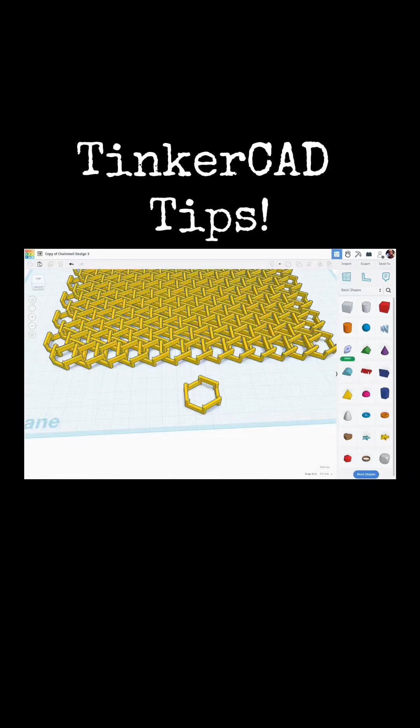TinkerCAD tip, still talking about 3D printed chainmail or these flexible fabrics. This is a design that I created myself. I just started with a polygon here, a six-sided polygon, a hexagon, and made some changes to it.

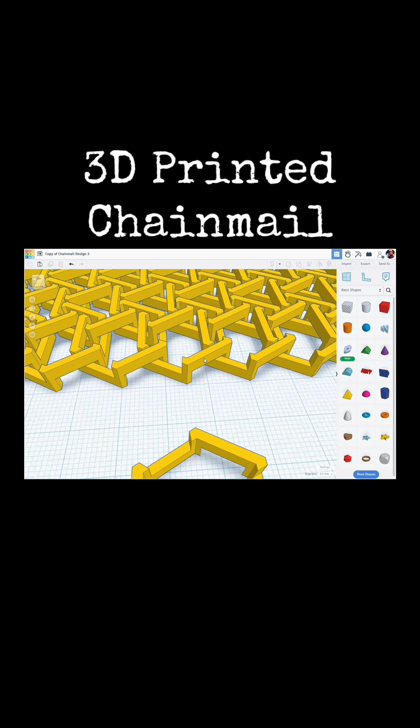You can see where this goes up and down, over and under. If we look at a piece of it here, again, there's a gap that goes between each piece so that when it prints, it doesn't stick together.

The way I made this, I'll show you here. Let's grab a duplicate of that, bring it over. Let's ungroup that. And you can see here that it's a number of hole shapes and a solid shape. So here we just have a hole hexagon that was made a little bit smaller. And then here, if I bring this up, you can see this is just a couple of triangles. The same with underneath.

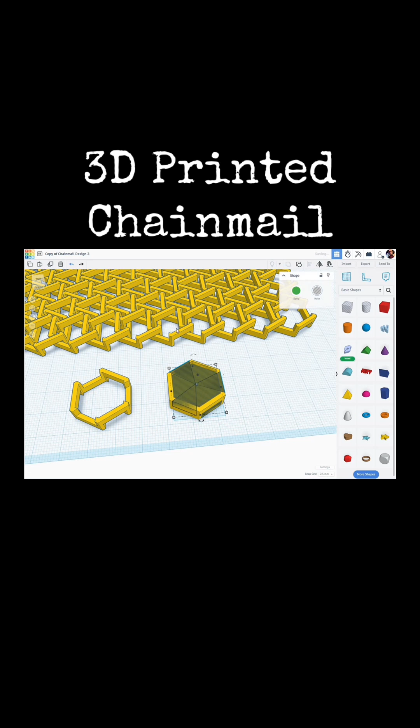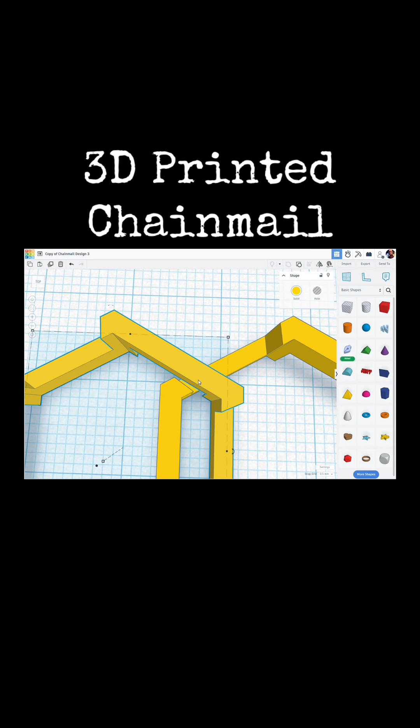So let's take a duplicate of that and we'll shift nudge this over a little bit. We'll zoom in to make sure our spacing is good. It's a little too close. Let's move that over. There we go. And by keeping that selected and hitting Control D, I could move out.

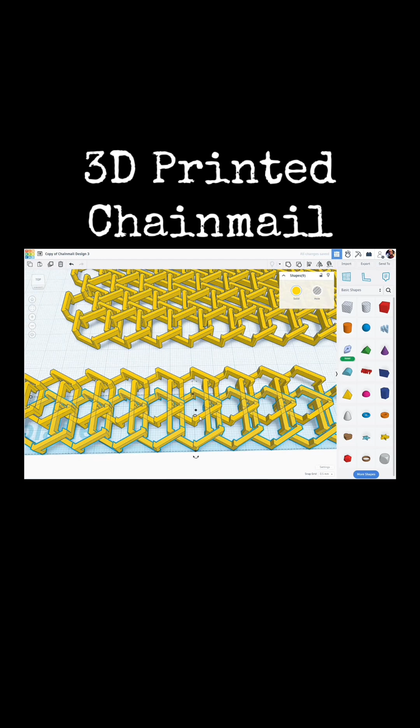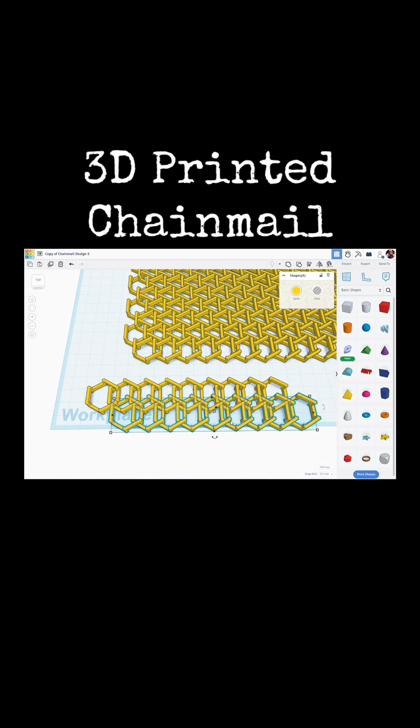We can select all of these. Let's make a duplicate of that. Now on this one, we're going to have to shift over a bit. So if we zoom in here, we can get our spacing correct. There we go. Zoom in a bit. Let's move that back over. Let's move that back one this way. There we go.

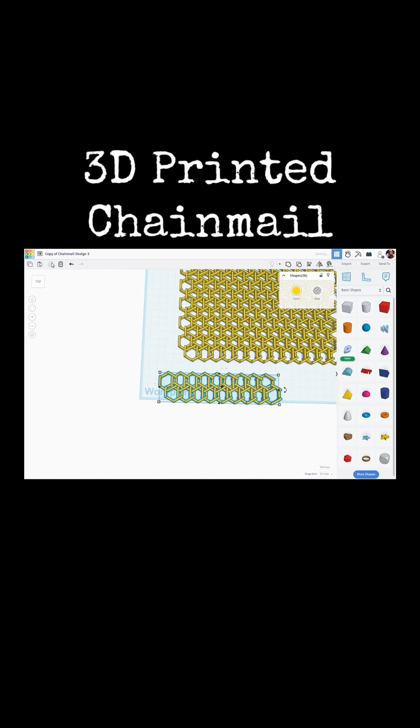Right now that we have those two rows, because they're offset, we'll have to take a duplicate of that. And again, we'll shift nudge those into place. Right about there. Keeping that selected, we'll just start hitting Control D.

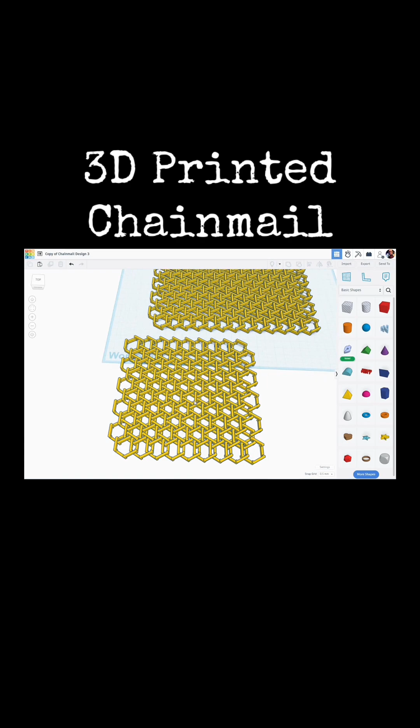Now we could make these sheets as small or as large as we want. So let me show you what this looks like when this is 3D printed. And this is that open hexagon design. If we look at a corner here, you can see the six-sided object with 3 down and 3 up. This was printed at a fairly large scale. I still have plenty of room to shrink this up a bit, but it's a very open design, quite flexible.

It printed well. I didn't have any parts of it sticking together. As you get smaller, you might run into problems with that, but as you go larger, there'd be more of a gap or a tolerance between the links. But this is a fairly good design too. It worked out well. Holds together pretty well. It's fairly strong.

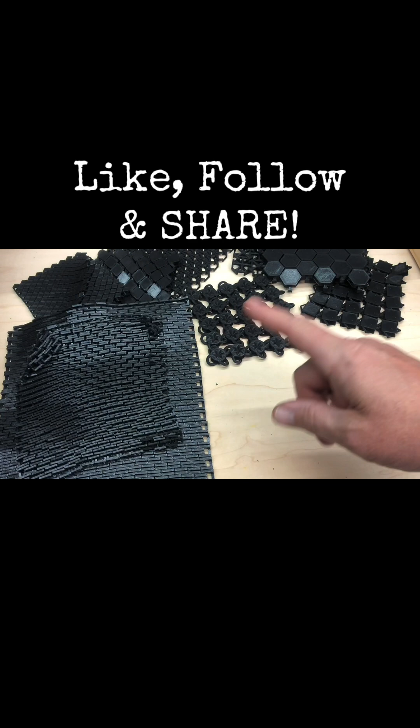I still have plenty more examples to go over here. Some designs that also work, but some that didn't work.